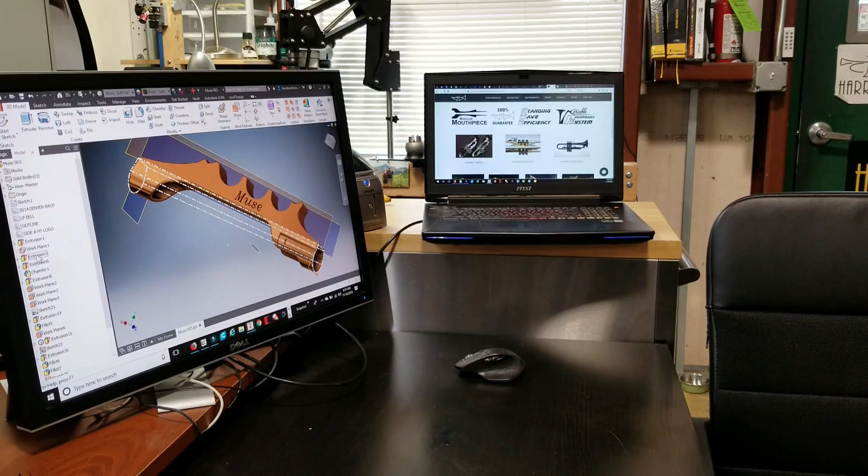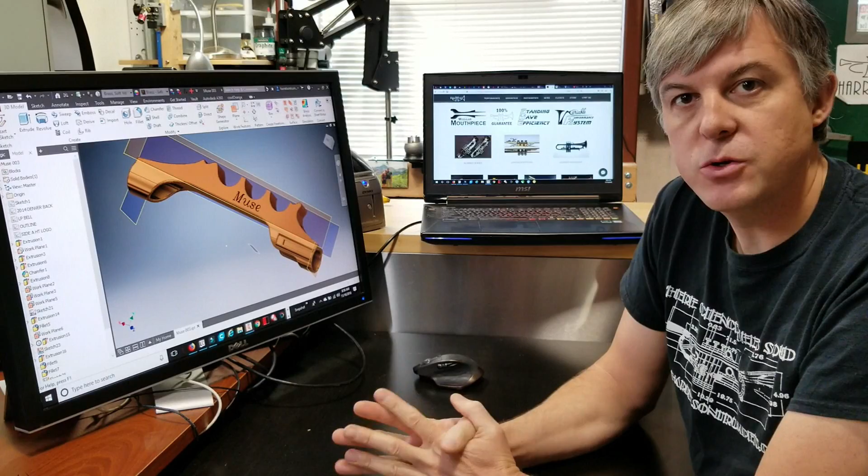This week on Shop Talk, we are going to be discussing the Muse Trumpet and the Bravura Flugelhorn. I want to start off by discussing the Muse, and today we'll have a couple different monitors up here so I can show you some things on the website and some things in our CAD program.

We're going to be using Inventor today, and we'll take a look at what the future holds for Harrelson Trumpets and why we're moving towards modular trumpets. First, I want to look at our website and give you an idea of where to find the newest innovations on Harrelson Trumpets.

If you go to harrelsontrumpets.com, click through until you get to this page: Variable Performance. In this section, we have three different questions, or choose your own adventure: you can choose more comfort, less effort, or flexibility and adjustable airflow. Each of these takes you to a different part of the website that helps you improve your playing, either through a mouthpiece, added efficiency, or our variable performance system.

We'll discuss those another time. Right now we're going to go up to Instruments, which is right here in the middle. When you're on Instruments, you can come down and see the different series of instruments. We've got Summit, Limited Editions, Summit Midnight, and then our newest models are down below that.

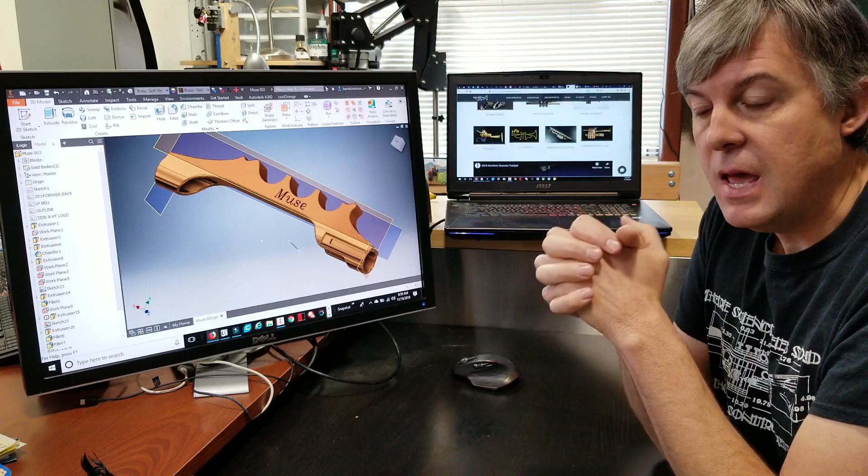Those include the X Series, HT6, Bravura, and the Piccolo trumpet - so we've got the Flugelhorn and the Piccolo. Today we're going to be talking about the Flugelhorn a little bit, and the Muse Trumpet, which we have a brace of up here on this screen.

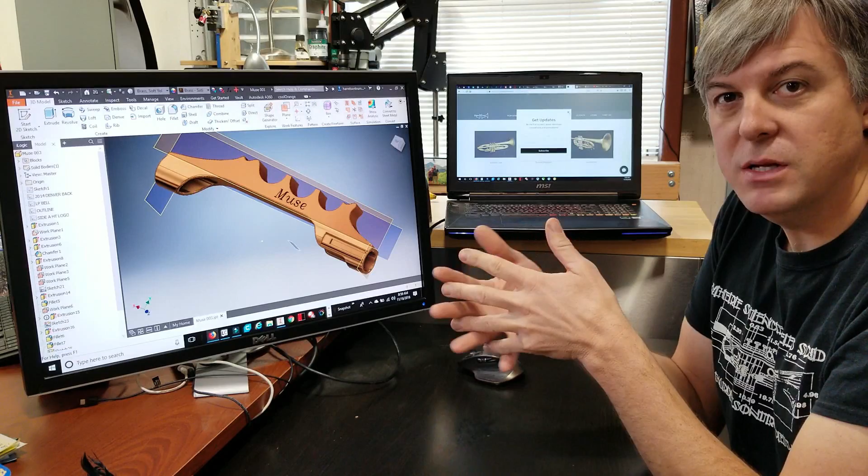So the Muse Trumpet, as you see, is not in this section. If we click on Limited Editions, then - oh, and here you could sign up for our email list. I would highly recommend you sign up for it because we will be sending all the updates, and we have in the past. Plus you get promotions, and you can participate in the Trumpet Challenge.

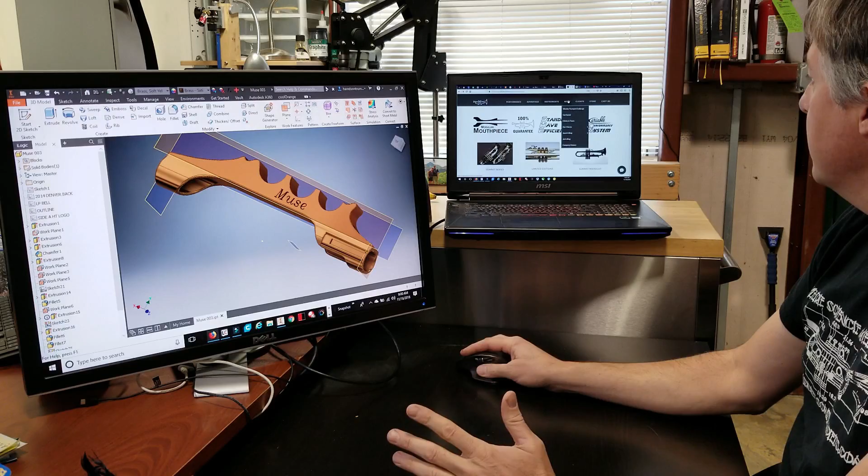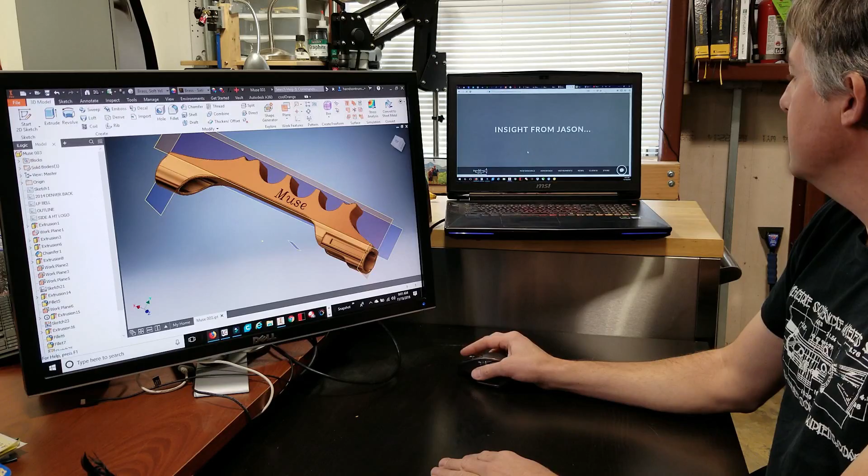I'm going to click News, and I will be having posts, regular posts, about what's happening. But if you want to read the inside details of what's happening on the Muse trumpet, under News you can read about the Muse on my blog. If you click on Jason's blog, right here is where you'll find the newest updates on the Muse trumpet. So let's go back to this monitor, and we're going to discuss a little bit about the bracing and the design concept of the Muse trumpets.

If you don't know this already, I designed the original Muse trumpet as my first series of instruments back in the early 2000s. Since then we've come a long way - we've learned a lot of new technologies, worked with a lot of software, done a lot of lab testing, and a lot of real-world testing with thousands of clients from all over the world.

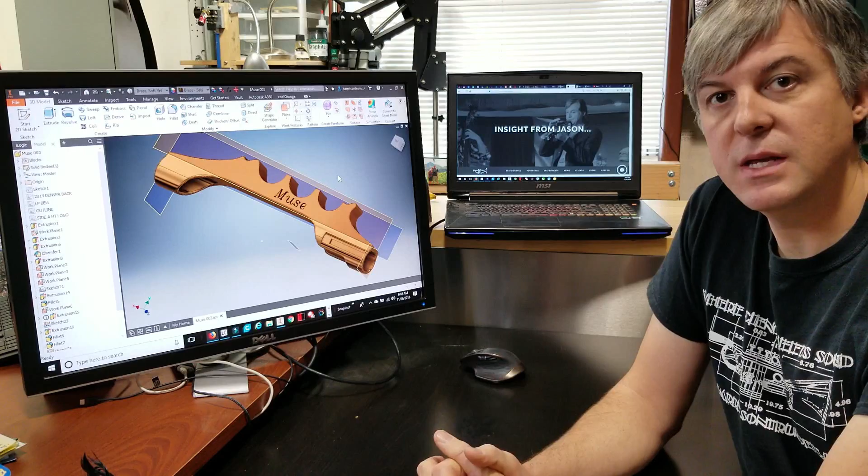Now we're to the point where we can really build almost anything we can imagine, and we're moving into territory of new materials, including different alloys of aluminum, stainless steel, in addition to brass, which we've always offered, and then titanium, Damascus steel, and maybe soon even Timascus, which is titanium Damascus. So that new production and the new materials are going to be introduced in the Muse series first.

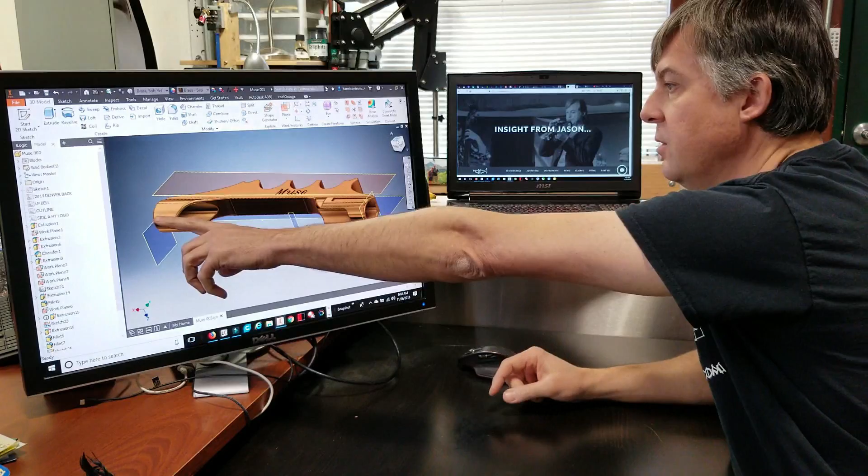And I'm going to show you this brace - let me move it around here a little bit. So here you can see there's a tube that goes through this brace. When we look at it from the top, let's zoom in here.

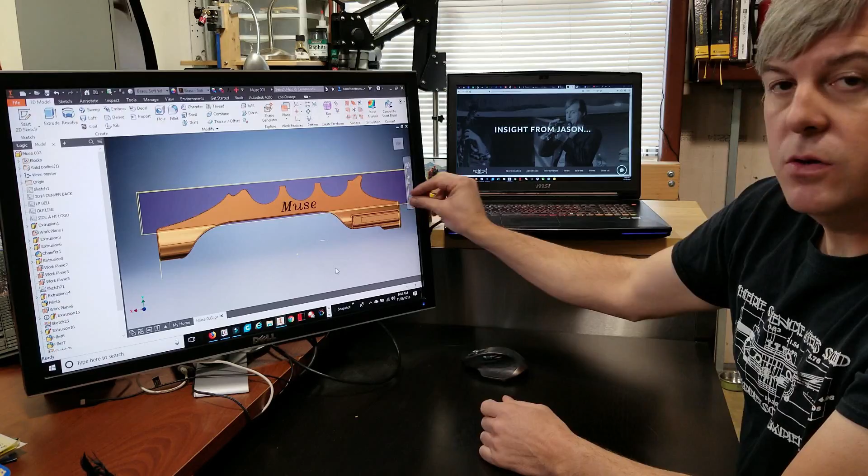So when you look at it from the top, you can see here is where the valve casing would be on one side. You've got your first, second, and third pistons there. This would be a dovetail slide pinky ring you can move around, and this is a tube for the modular lead pipe.

The way the modular lead pipe works is it's machined in 4 separate segments. The first 2 screw together, then they screw into here. The second 2 screw together, and they screw in from here, and the 2 sections in the middle will join, not by a screw, but rather just a tight O-ring fit.

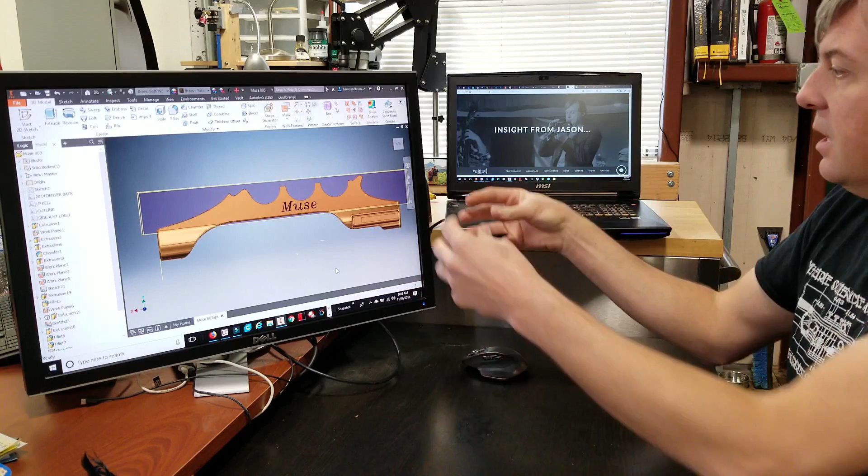So everything screws together from end to end, and I'll move it around here at a different angle. You can see how we have the tubes coming in from either end. This would be threaded, and this end is also threaded. And to reduce some weight, I do have a hole straight through this entire brace.

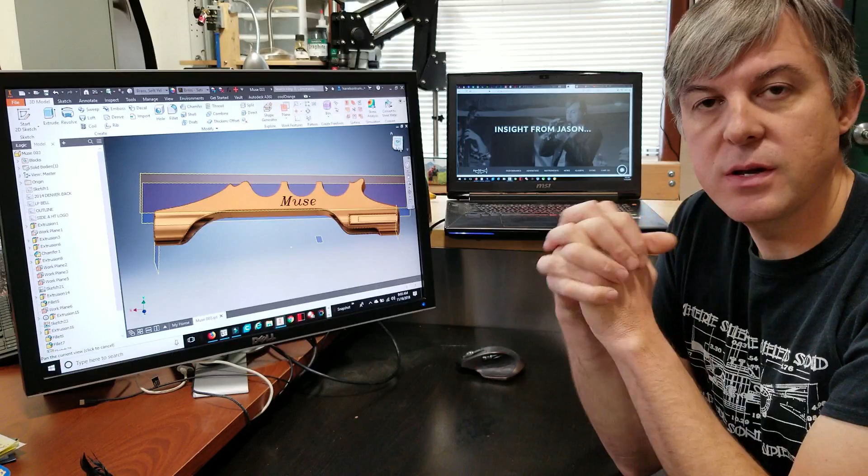So this gives you an idea of what that Muse brace looks like. The opposite side, where the bell connects, is quite a bit different, and I'll show you that in one of the next videos. But let me grab this brace so you can see it.

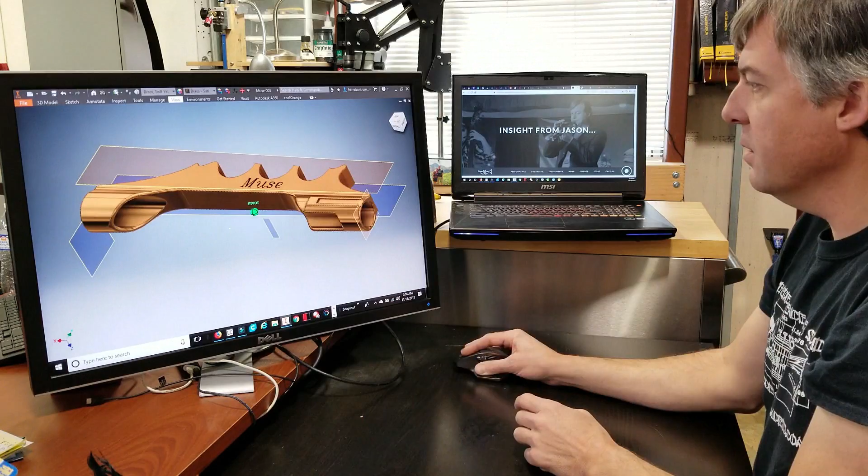So once again, here is the Muse brace. One thing I want to point out is this dovetail slide, which is going to be standard on the Muse series, and it'll be an option on the Summit series. Basically, there's a dovetail right down here, and you can put a pinky ring on there, slide it in wherever you like in any position, and then with a tiny set screw just put it in position.

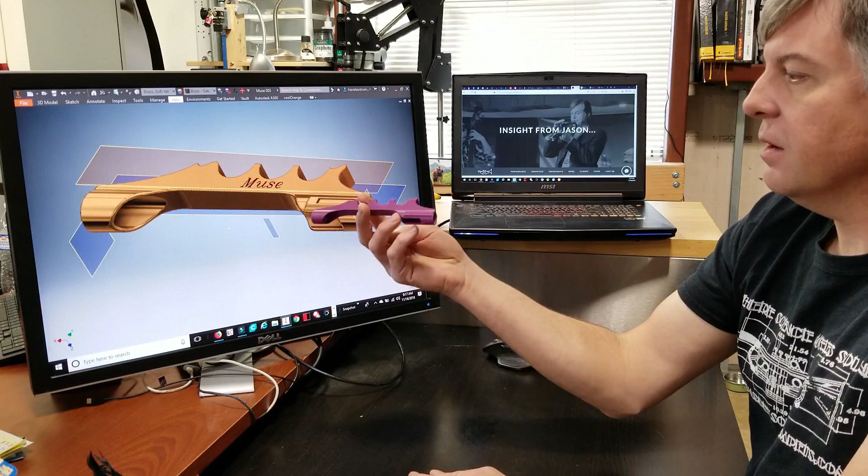You can do that for the first and the third rings as well. And we may have an option for underneath the thumb or underneath the lead pipe to have a thumb ring that's movable in here. So here is a 3D print of the brace, and in the next few days I will be machining, hopefully, the final version of this.

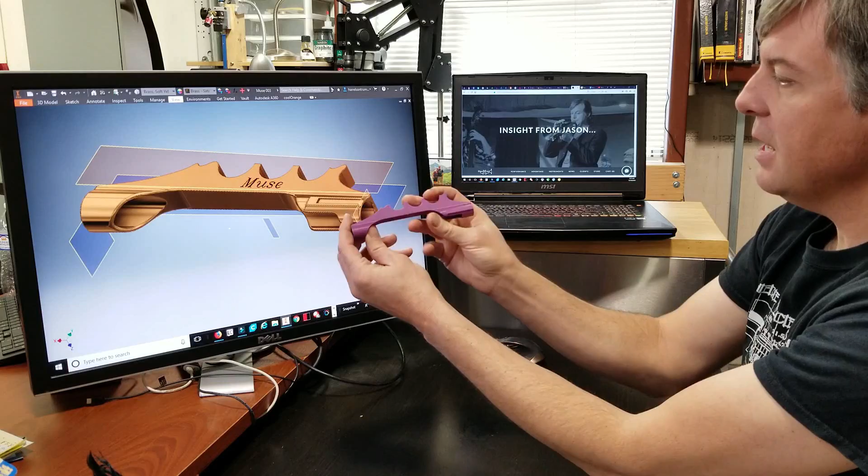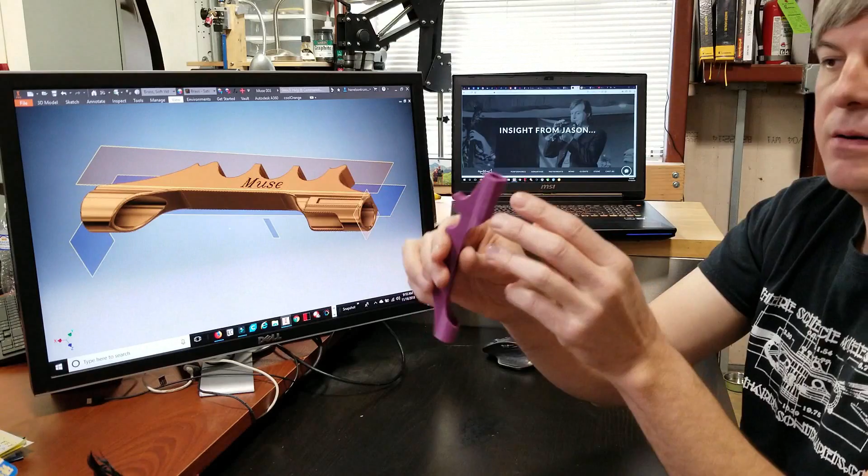Machining it has been quite a challenge because you have these overhangs, and when you are putting it in the machine as a solid block, it's pretty easy to cut all this stuff out. But when you get to this and to that, and to not have chatter, that's where things become a little bit of an issue. I think I've worked it out now, so we can machine this out of solid brass or stainless steel or aluminum.

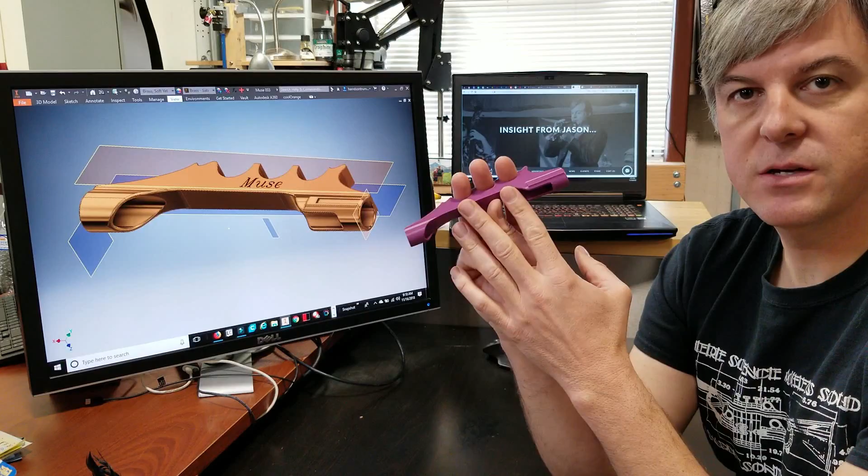And we have a few different ways of attaching this to the valve casing. One will be, say, imagine my fingers are the valve casing - just to solder it straight to there. Another way is to actually just use screws and some special epoxy that works with metal so that we can put it together faster and easier, and then we can remove it if we need to.

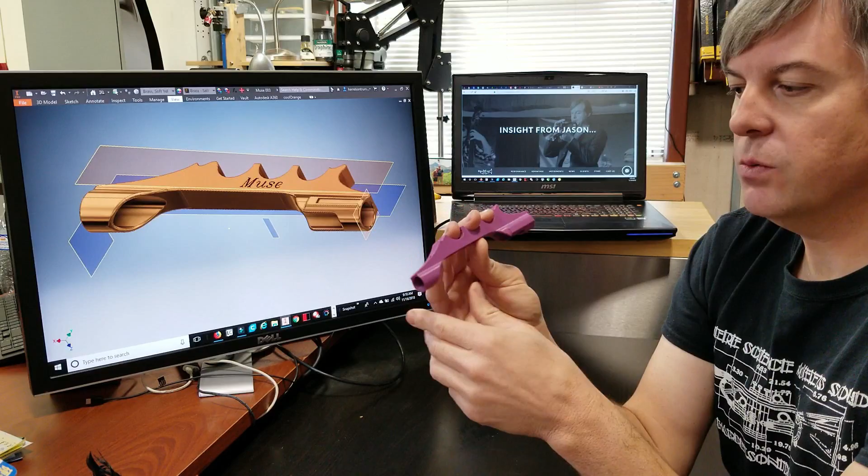Like I was saying before, there's a hole straight through, so that does lighten it up quite a bit. And it is possible that we can put horns together with full 3D printed parts, because these are very strong parts. But the newest versions of those are going to be in nylon with either fiberglass inside, like chopped fiberglass, or carbon fiber. So we've done quite a bit of experimenting with that as well.

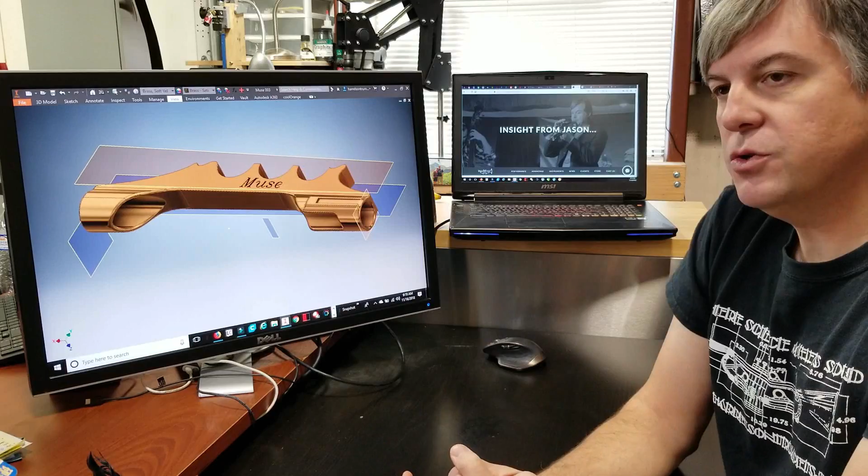So that is what you see in the Muse Trumpet. What you don't see yet are the actual machined braces. The tuning slide will remain the same as on the Summit series. The bell crook is almost identical, but it does screw in.

And I'll feature the other side of the horn, this back side here, in one of the next videos, so you can see the progress and see the bell crook and the bell and how all of that fits onto the horn as well.

And then we're growing the library of parts to include a full wall in our showroom. So we'll set up some cameras and do some video shoots there so you can see me interchange the parts and really put different horns together all in the same setup or the same base configuration of the Muse series. So we can interchange lead pipe segments, tuning slides, bell crooks, and bells, in addition to everything on the 5mm modular mouthpiece.

It's going to be a lot of fun. I've worked most of my life to get to this point, so I'm very excited to see the results. All right, I'll see you next time.